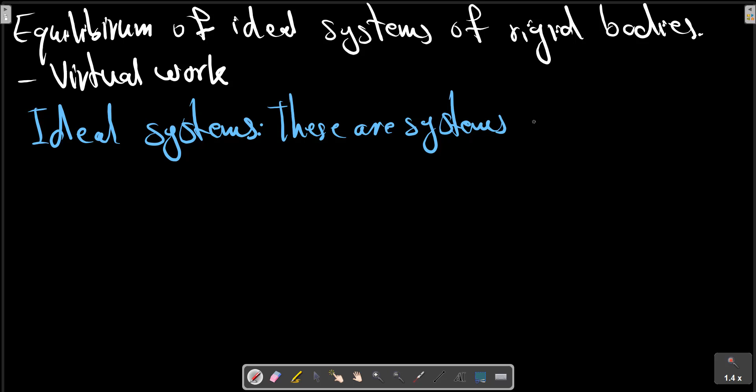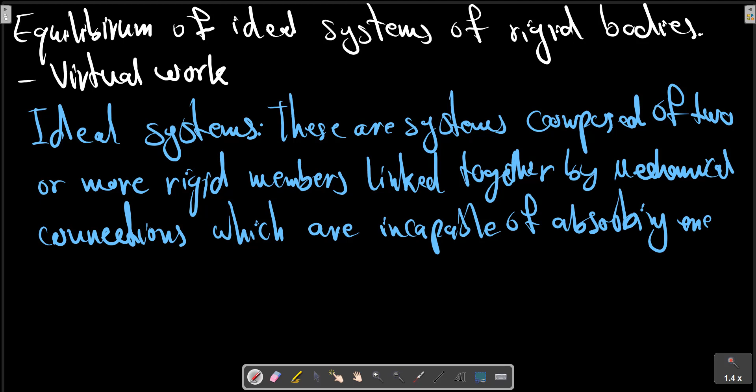These are systems composed of two or more rigid members, composite of two or more rigid members linked together by mechanical connections which are incapable of absorbing energy through elongation or compression.

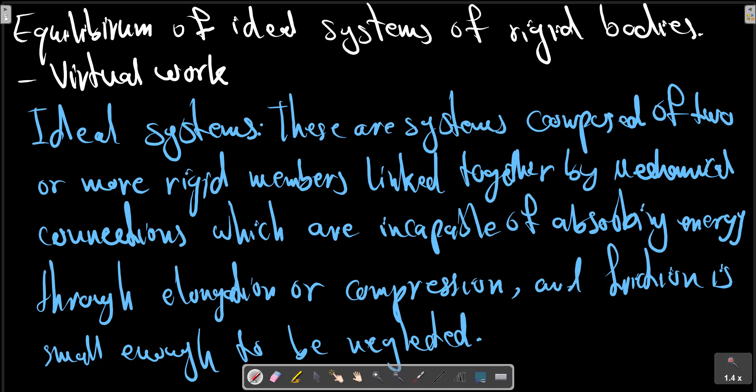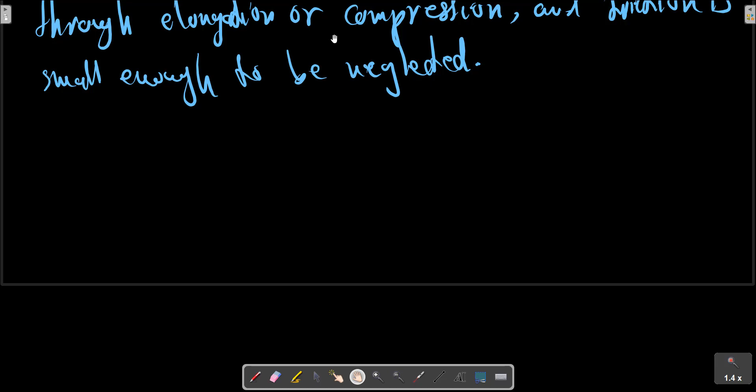And in which friction is small enough to be neglected. For an example and more description, consider this picture. Part A shows a simple example of an ideal system.

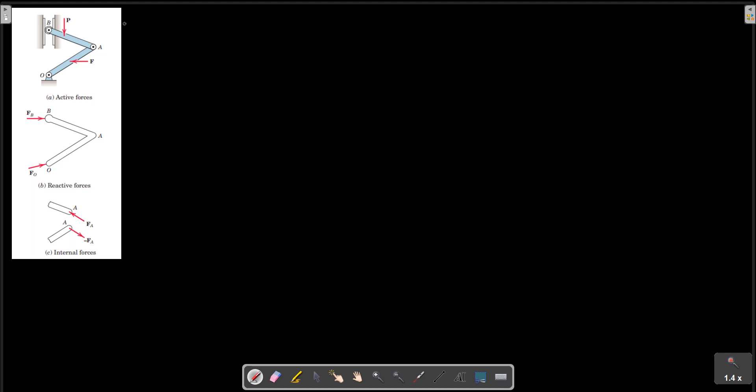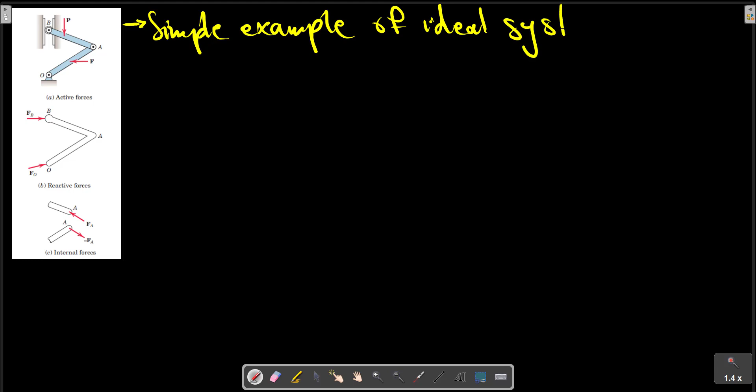Where relative motion between its two parts is possible and where the equilibrium position is determined by the applied external forces P and F as shown in the picture. We can identify three types of forces which act on such an interconnected system. One, active forces.

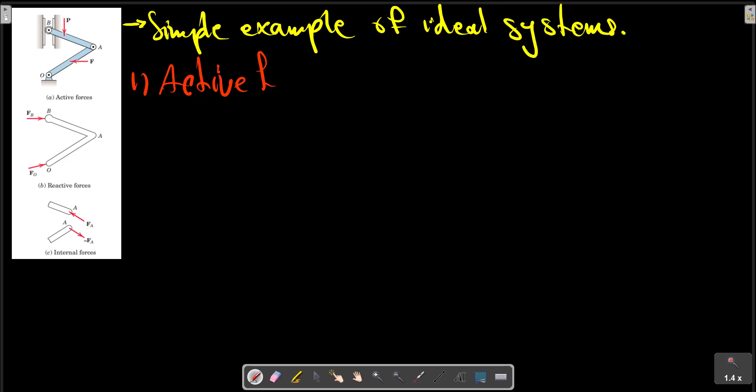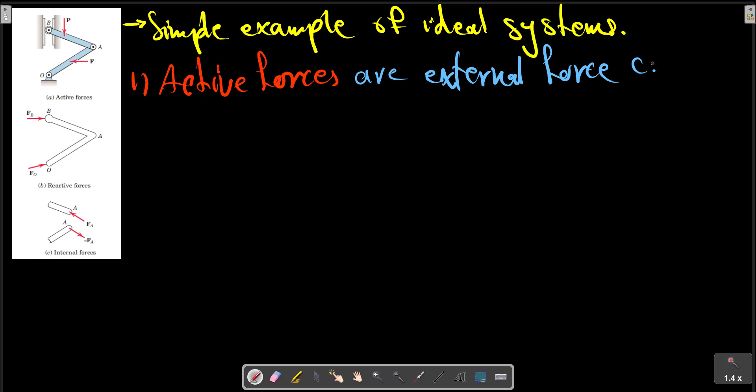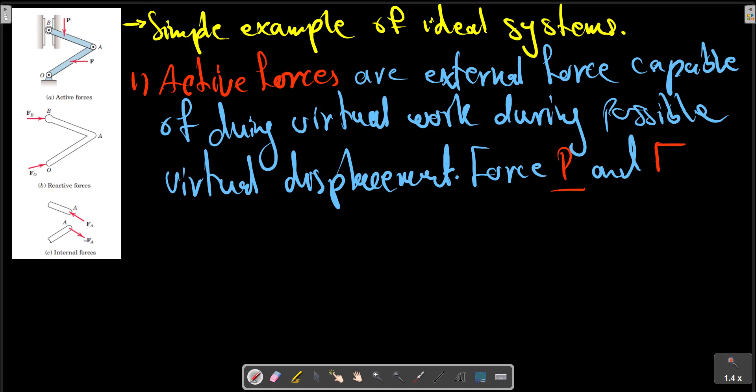Active forces are external forces capable of doing virtual work during possible virtual displacements. Forces P and F are active forces in this picture. Forces P and F are active forces because they would do work as the links move.

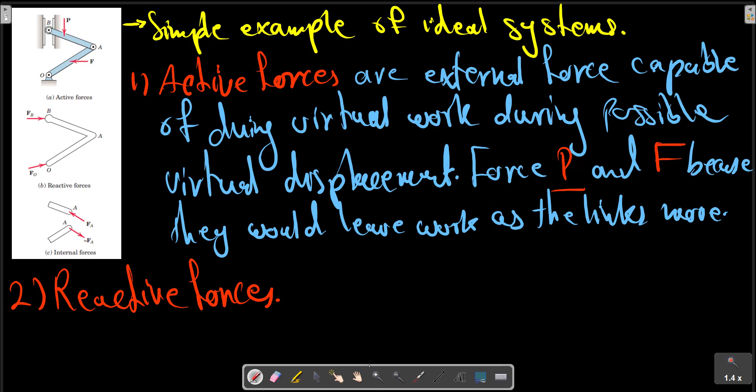The links and parts. Category two, reactive forces. Are they external forces capable of doing virtual work during possible virtual displacement? In the picture provided here, excuse me, it is for the previous, and reactive is different.

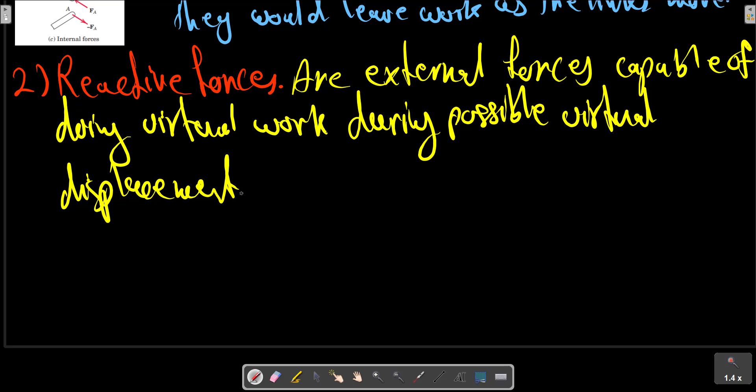Reactive forces are forces which act at fixed support positions where no virtual displacement takes place in the direction of the force. Reactive forces do no work during a virtual displacement. No work during virtual displacement.

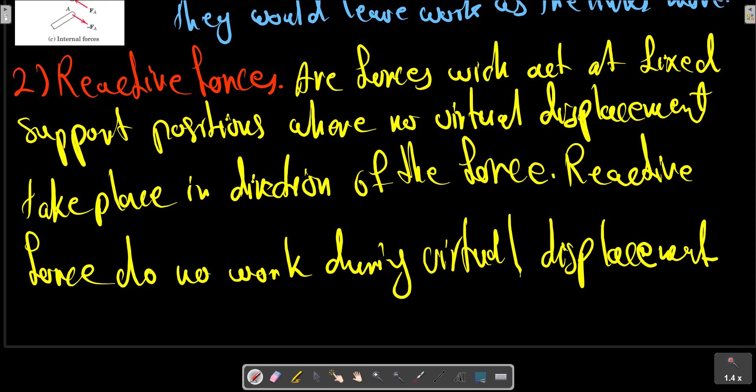In this picture, the horizontal force Fb, as shown here, exerted on the roller end of the member by the vertical guide can do no work because there can be no horizontal displacement of the roller. Because we have a reactive force here, and because we don't have any horizontal displacement in this roller, there is no work here.

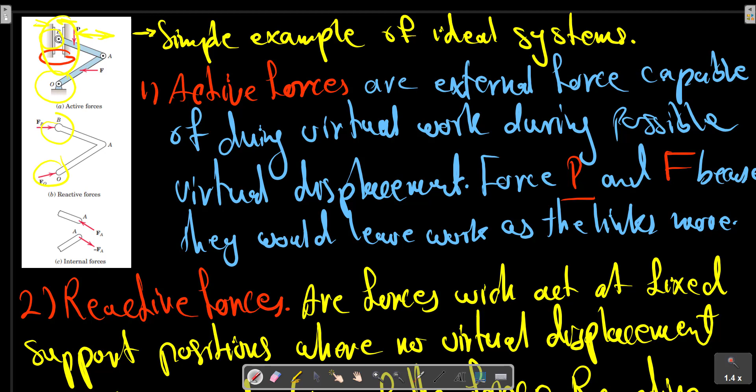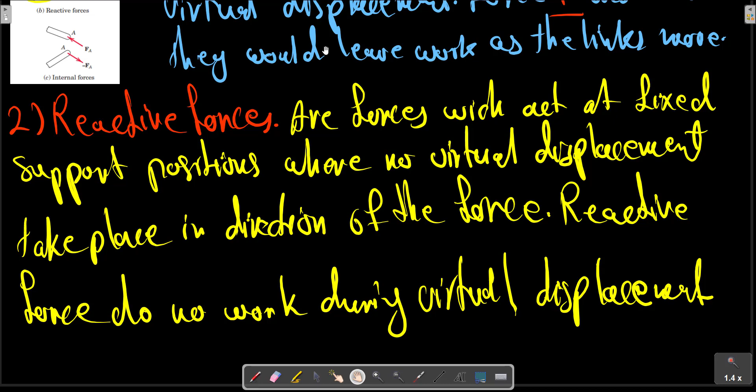The reactive force FO exerted on the system by the fixed support at O also does no work because O cannot move. The forces at these points shown here are the reactive forces. Internal forces are the next category. Three, internal forces.

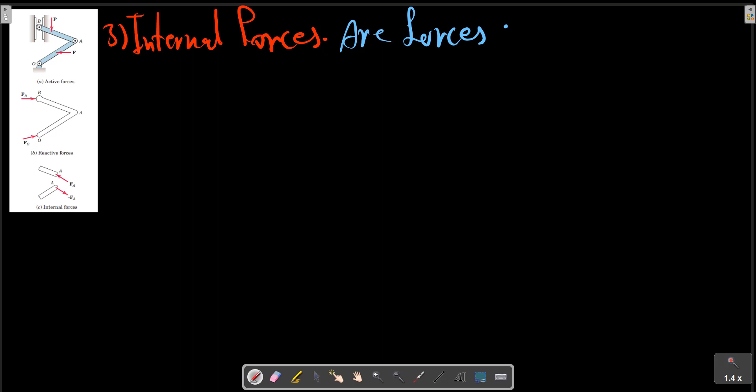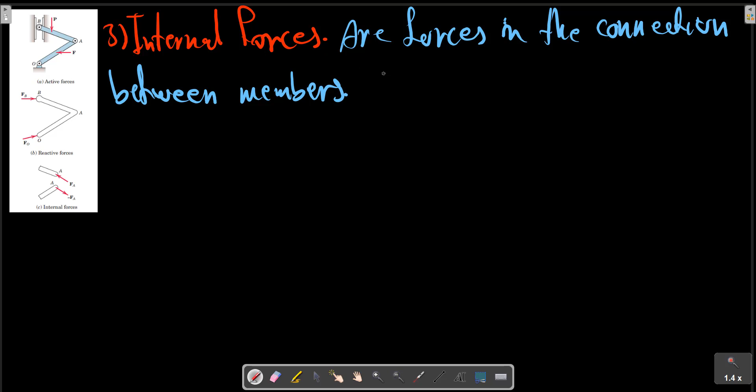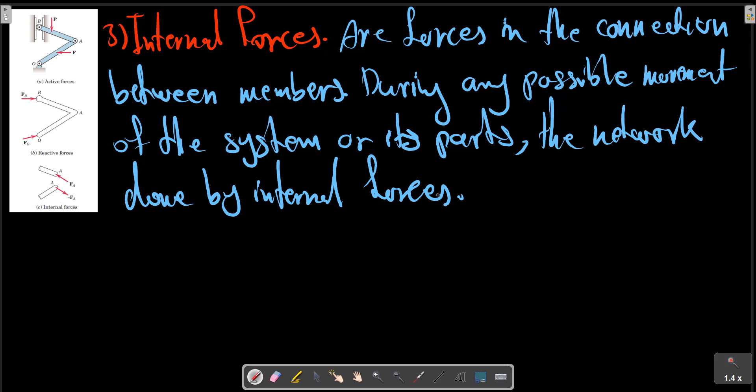Internal forces are forces in the connections between members. During any possible movement of the system or its parts, the net work done by the internal forces at the connections is zero.

This is so because the internal forces always exist in pairs of equal and opposite forces, as indicated for internal forces Fa and minus Fa here, at joint A. The work of one force therefore necessarily cancels the work of the other force during their identical displacements.